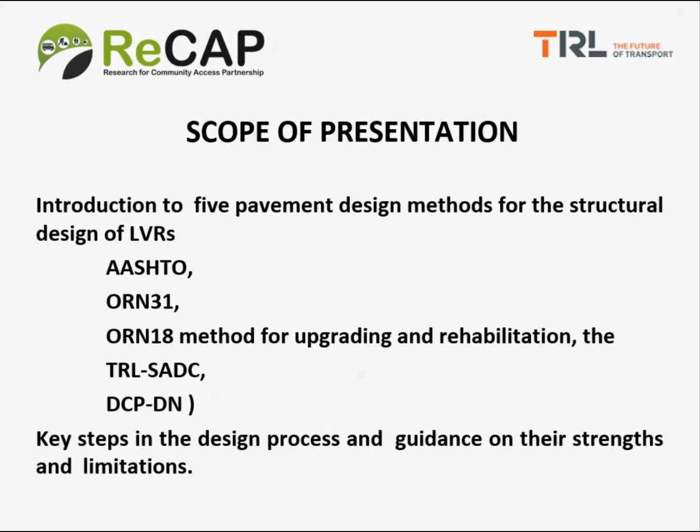What I'm going to do is introduce these 5 methods to you. Then we're going to go through the key steps in the design process and guidance on the strengths and limitations of all the methods, to help you choose which one to use.

The first thing we have to do when designing a new road is to make a decision on what type of road to build. Do we want an earth road, a gravel road, or a sealed road? We're going to talk about sealed roads in this lecture, but that decision has probably been made during the planning stage of the project. So let's assume that for now.

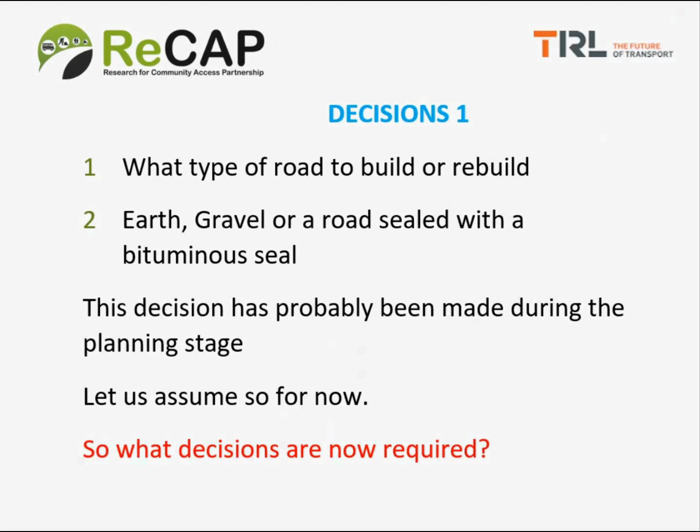So what decisions are we, as the structural designer, required to make? First, there will be some preliminary information available to you — measurements of the traffic level, for example, and potential materials we could use for construction. We'll assume these decisions have been made and we're now sitting down at our desk to do the design.

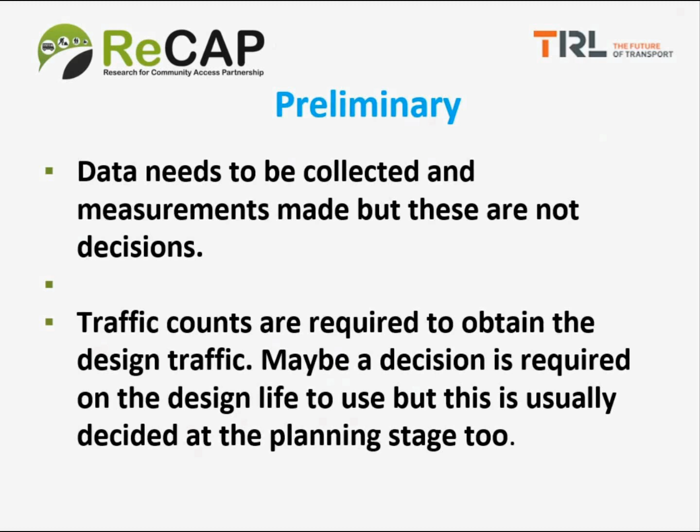The first decision we have to make is to determine or select the strength of the subgrade for the design process. The key difference between the design methods we're going to talk about is that they don't always do this in the same way — this is one of the major differences between the methods.

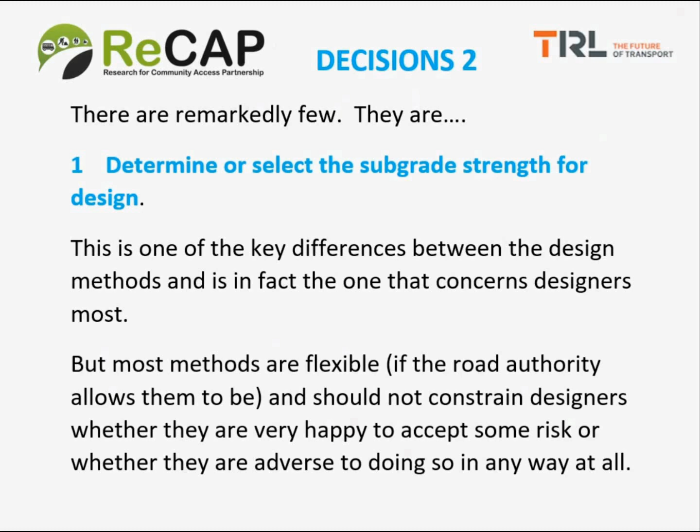But this is quite important: most methods of design are flexible, provided the road authority allows them to be. In other words, the designer has some flexibility or not. The methods do not constrain the designers, and in each method you have to decide how much risk you can take — are you going to cater for the worst possible conditions or not? The designer can make those decisions, and each method has its own way of dealing with this, and that's important.

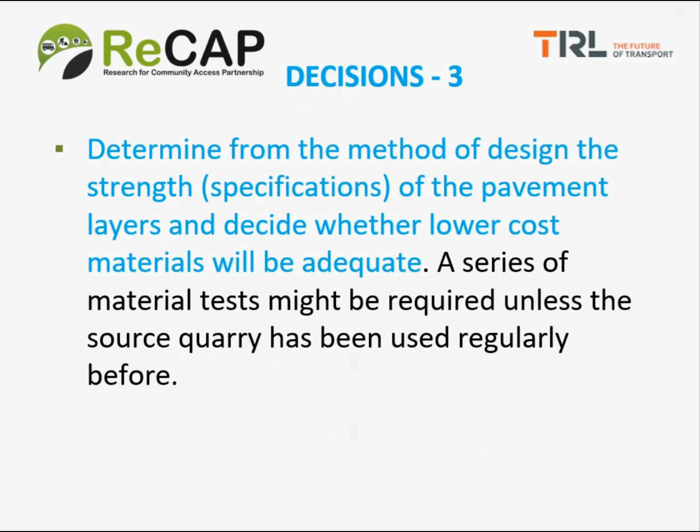Having looked at subgrade strength for design and how it should be assessed, the next decision is on the materials you're going to build the pavement from. There should be material tests available so you can see what materials are in your vicinity. You can also check whether you can relax the specifications for a low volume road — you don't need the major strength materials needed for a high volume road. The first thing to do is check whether there are other, less expensive materials available.

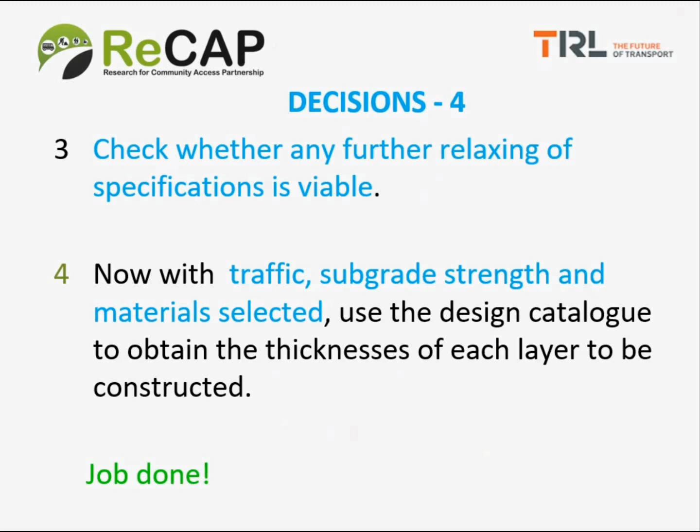Now you've actually made almost all the decisions you need to make. You've got your traffic level, your subgrade strength, and you've selected the materials. You pick up your design catalogue, and basically the job's done — literally done. You won't believe that, but you'll see in a moment.

Now we have some golden rules. The first and most important is that each method must be used in the way that the people who developed it, the authors of the method, intended. Unfortunately, this is not always made clear, with the consequence that methods can easily be used incorrectly. A good example is the one at the bottom of the slide.

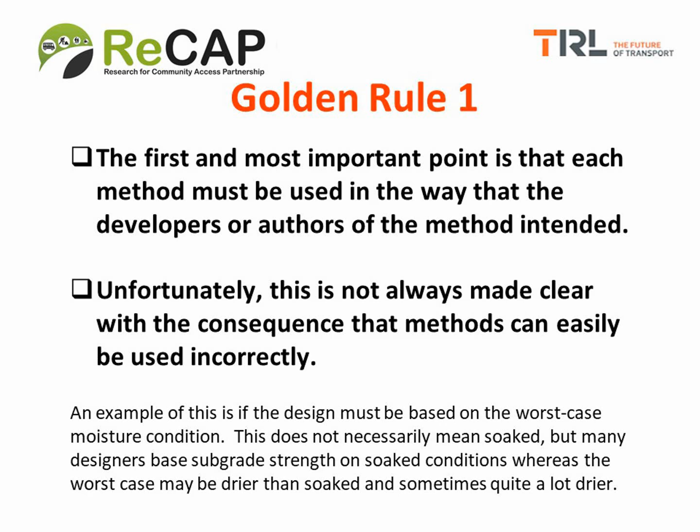A method may ask you to base your design on the worst case moisture condition of the subgrade. This does not necessarily mean soaked, but many designers base subgrade strength on soaked conditions, whereas the worst case may be rather drier than soaked, sometimes quite a lot drier. If you base it on soaked when you shouldn't, you'll be over-designing. That's perhaps one of the most common errors, which we'll come across later and show how to avoid.

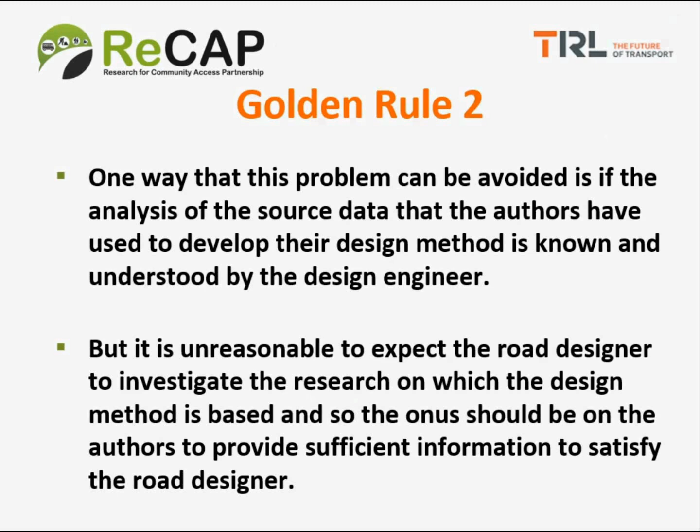Golden rule 2: one way this problem can be avoided is if the analysis of the source data that authors have used to develop their design method is known and understood by the design engineer. Of course, it's unreasonable to expect the road designer to investigate the research behind the design methods, so the onus is on the designers or authors of the manuals to provide sufficient information so the road designer isn't taking any risks.

Risk number one: risk is a necessary but unwelcome aspect of civil engineering. It's addressed differently in various pavement structural design methods, and this often causes uncertainty amongst designers. For example, for large structures such as bridges, failure is very expensive, so very safe designs are selected to withstand the very rarest severe storms.

Andrew has mentioned storm intensity and storm severity. The storm that occurs on average once every 100 years is the most severe storm. Designing for the very rarest storm events—maybe we should be designing our roads for something like that. But for small structures that are inexpensive to repair or replace, the 1 in 20 year storm, which is obviously not so severe, is used for design.

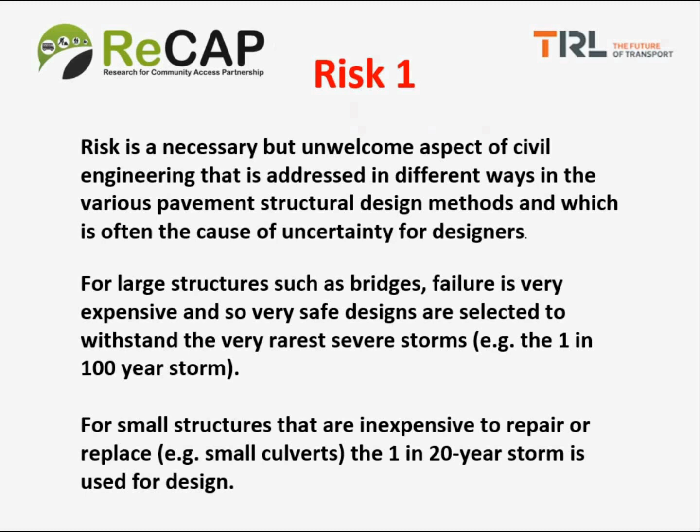So what do we do with our road itself, for more common storms? We've already talked about the problem of climate resilience, and we're well aware now that the climate is changing, so the question of safety risk comes in even more now than it used to. Andrew's given you some advice on how to design structures for severe storms and climate resilience, but what do we do about the actual pavement itself?

Few, if any, design methods actually define the risk levels they are catering for. Road designers are well aware that over the design life of a typical road, many things can go wrong—for example, there are likely to be severe storms. Ideal maintenance to keep culverts and drainage ditches clear and to rectify erosion and surface damage cannot be guaranteed. So the designer cannot predict the future; he has to take a risk.

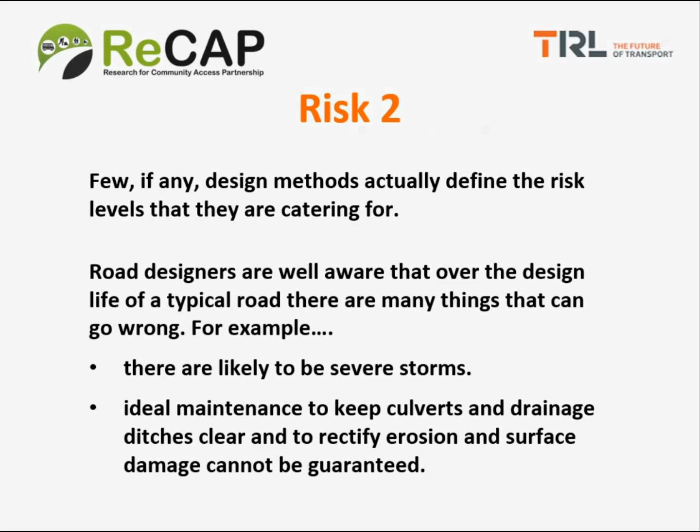We'll come back to those risks when we go into the design methods in more detail. Thus, with no easy quantification of risk available, designers are often tempted to err on the side of safety—a perfectly natural human reaction. We don't know what the problems are going to be, so let's play safe. But to do so, designers must understand how their design charts were devised and how they should be used. That knowledge is important for doing your risk analysis.

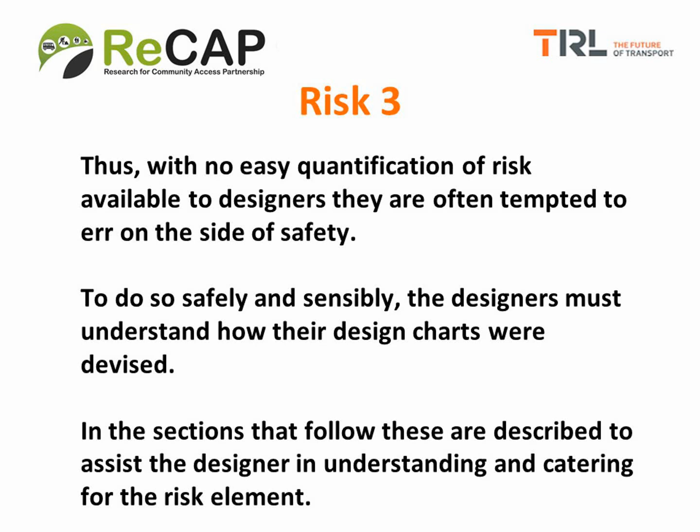In the sections that follow, the method by which the design charts have been built up is described in order to help the designer understand and cater for the risk element. Later on, there is a summary of all the risk elements in each method to make it clear to the designer. So that's really an introduction to the guideline, and I'm now going to go briefly through the different pavement design methods.

There's the list that I showed you initially. The first five are based on the California Bearing Ratio test, which most engineers will be familiar with—used for measuring the strength of materials, in particular the subgrade and the pavement layers. The last two methods are based on the use of the dynamic cone penetrometer.

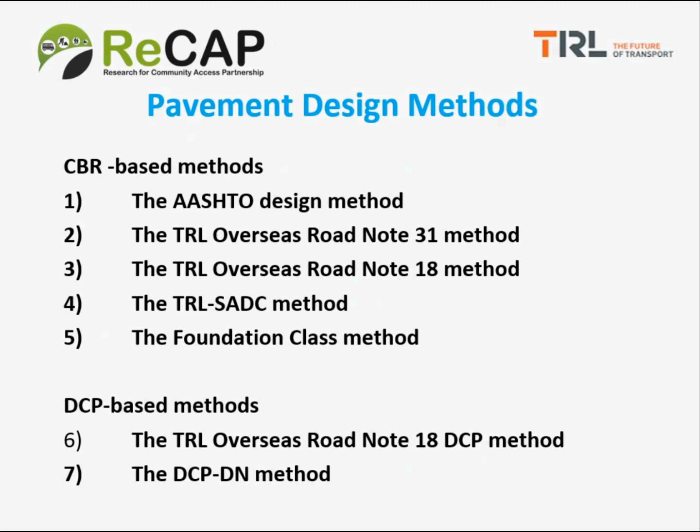In method 7, it completely replaces the CBR test—CBRs are not used at all in that method. Method 6 incorporates both the DCP and the CBR method. So essentially, those are all the methods that we're going to talk about.

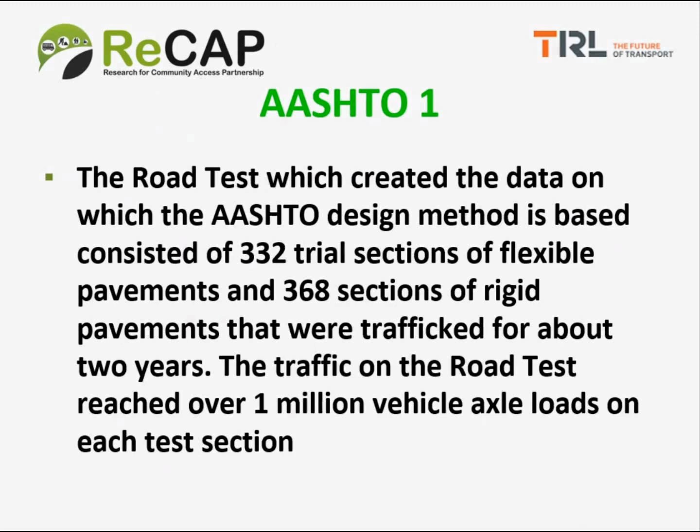The first method is the AASHTO method. It's based on a very famous road test that took place in the 1950s. A total of 332 trial sections of flexible pavement road were built in America, and these roads were trafficked for about 2 years. The traffic reached over 1 million vehicle axle loads on each test section. It was a massive test, and it led to the development of a pavement design guide, first issued in 1961, but updated in 1972 and 1993.

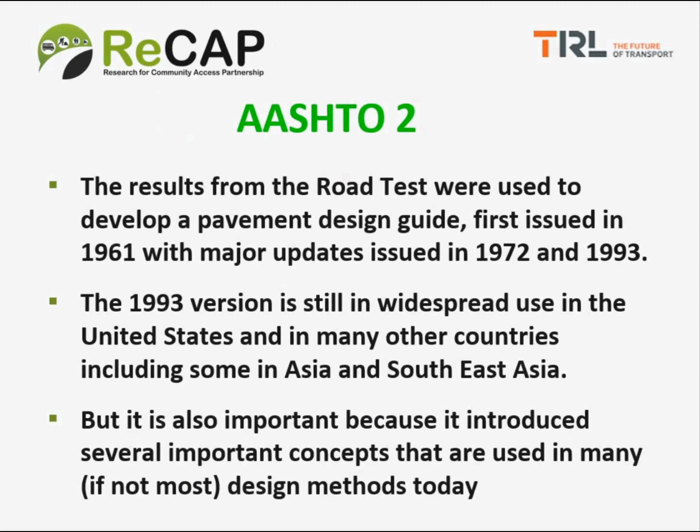The 1993 version is still in widespread use in the United States and in many other countries, including some in Asia and Southeast Asia. But the reason this particular method is included in the manual is that it introduced some very important concepts that are used in many, if not most, all design methods today. So it's important to understand those concepts for all the methods.

Key concepts used universally that were introduced in the AASHTO method are the way pavement damage is quantified, the concept of standard axles—which relates to the amount of damage an axle does to a road—the structural number, which is essentially the thickness of the structure you're going to build, and very importantly, what I've called variability and reliability. What came out of the road test was that roads, even if built identically, can behave quite differently.

There's huge variability in performance, and the AASHTO road test, or at least the design method, was the first that really took that into account in the method itself. It's quite important, as you'll see later. And of course, the last thing produced here was an equation, the model of the design equation that is used to do the designs.

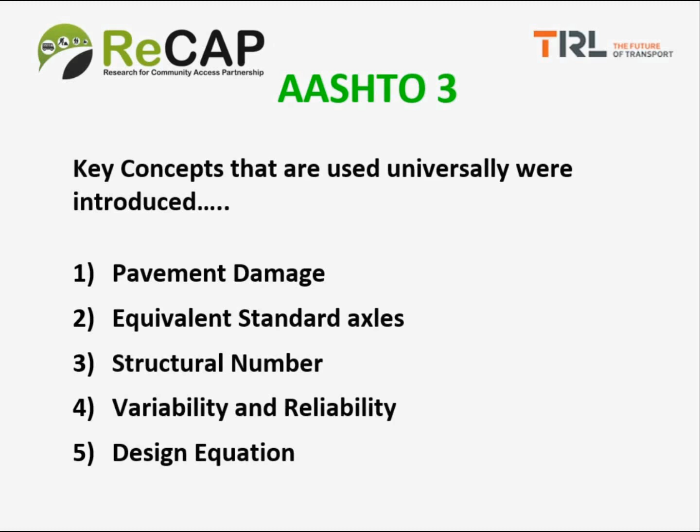So those are the 5 major concepts that came out of that road test. I have to go through them one at a time because they are universal. Damage caused by an axle load of L tons is compared with the damage caused by a standard load of 8.16 tons. The equation relating to the damage is that damage is proportional to the load raised to the 4th power, the so-called famous 4th power law.

So any axle of any load L is related to the damage caused by the 8.16 ton load, and we call that number the number of equivalent standard axles. Every design method that I've come across uses that. There are still 1 or 2 that still count vehicle numbers, but they're very few indeed.

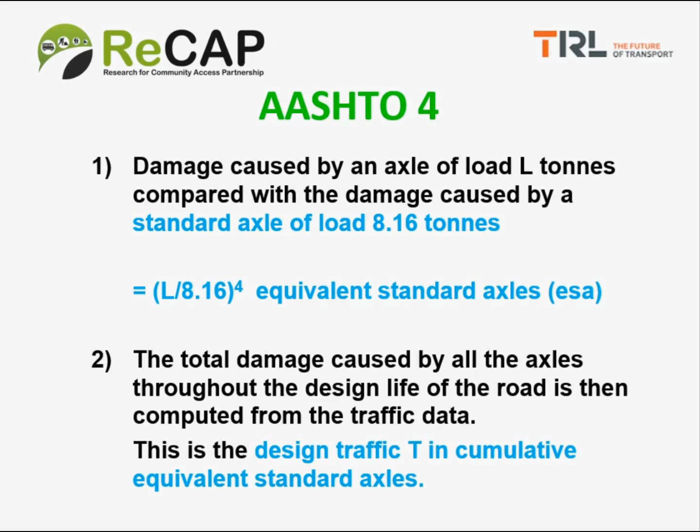The most important thing is that the total damage caused by all the axles throughout the design life of the road is computed from the traffic data. The traffic data tells us what traffic is using the road now, and what the future traffic should be. The traffic is turned into equivalent standard axles and summed over the whole design life of the road, and that number is used in the design methods.

The second concept is the structural number. It is essentially the total thickness of the pavement, but each layer is weighted by its strength. In the equation, H is the thickness of the layer and A is its strength, calculated from the normal methods engineers use to measure the strength of materials.

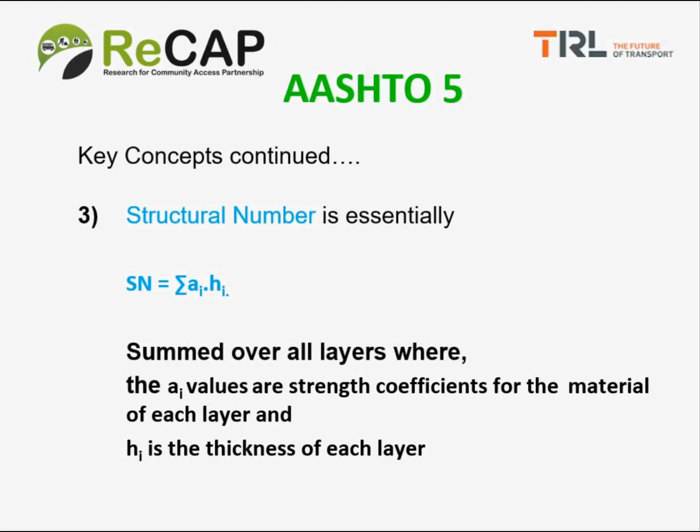That's all in the manual, and it's really quite easy to do. By calculating the structural number of one pavement compared with another, you can immediately see which one will carry the most traffic. So structural number is the second concept.

The structural number of the pavement is thus the total thickness made up of different layers, but each one weighted by the strength of the material, with the strongest layer at the top. The pavement thickness required, or the structural number, actually depends on just 2 quantities: the traffic level and the strength of the subgrade.

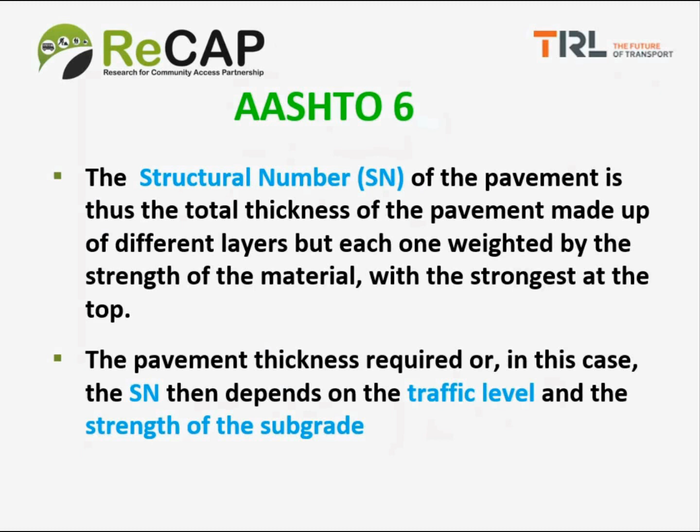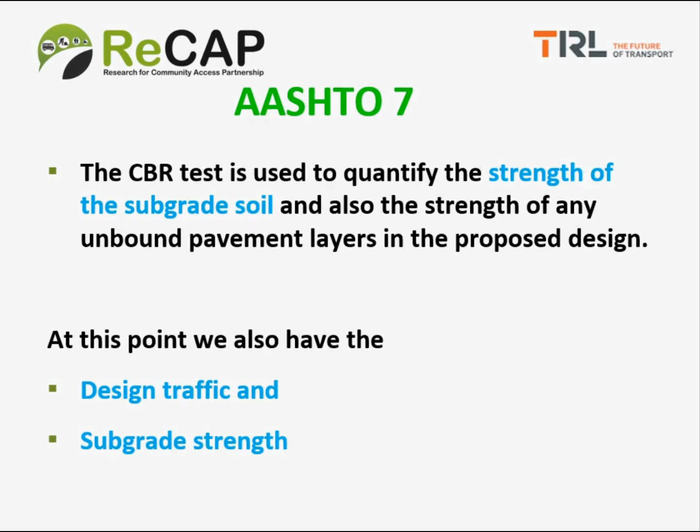The CBR test is used to quantify the strength of the subgrade soil and also the strength of any unbound pavement layers in the proposed design. So at this point, we also have the design traffic and the subgrade strength. The structural number of the pavement required to protect it from the estimated traffic loading is computed from the design equation.

So we've essentially finished the structural design, because we have the structural number to protect the pavement. All we now have to do is convert the structural number to actual materials, and then the layer thicknesses can be computed. You know how the structural number is calculated, so converting that into layer thickness is quite simple.

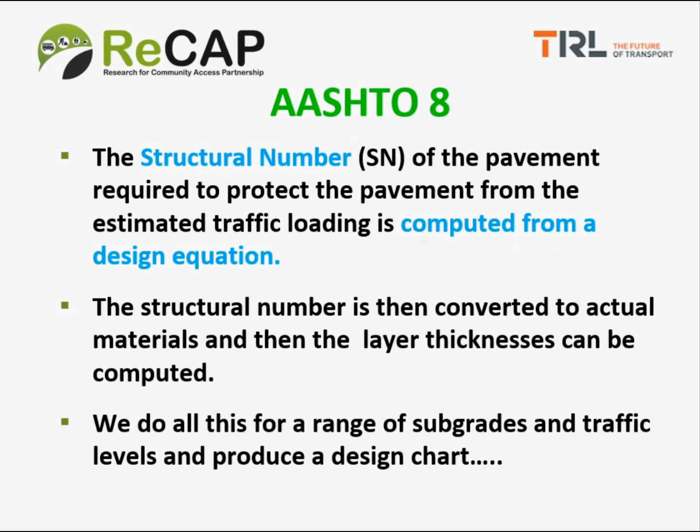Now we can do this for a whole range of subgrades and traffic levels using the design equation and produce a design chart. This is how most of the methods are presented to the designer. As you can see from the chart, the traffic level is along the top, and down the left-hand side is the subgrade class or strength. In each little box is a diagram showing the various pavement layers you need and their thicknesses.

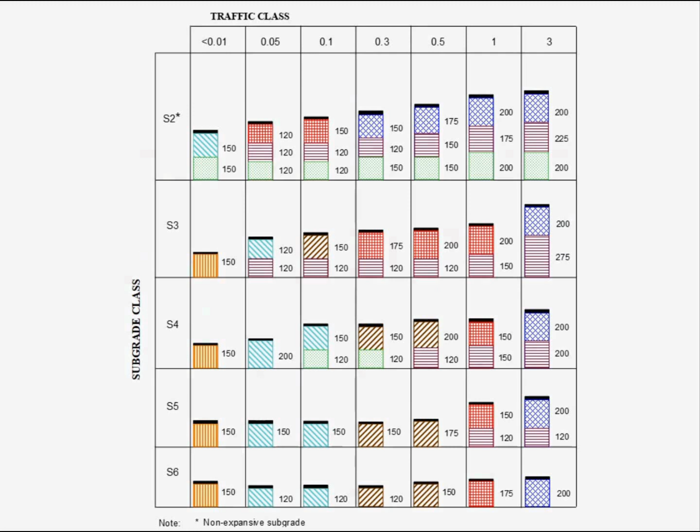In this particular case, we've used the design method 35 times and produced 35 designs covering those ranges of subgrade strength and traffic level. That is the easiest way designs are presented, and most methods do it this way. So what's the problem? We've got the subgrade strength, the traffic, the structural number, and we've worked out the thicknesses.

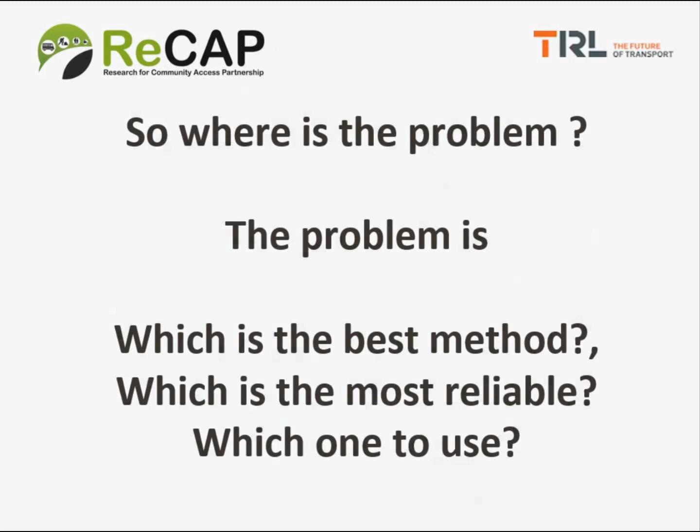What is the problem? Well, the designer will say, which is the best method, which is the most reliable method, and which one should I use? This is really the heart of the chapter and of the guide, to advise you on how to do this.

First of all, golden rule number 3: the methods are empirical and based on successful designs. The golden rule is that the method must be used within the range of conditions in which it was developed. There must be no extrapolation of any parameter.

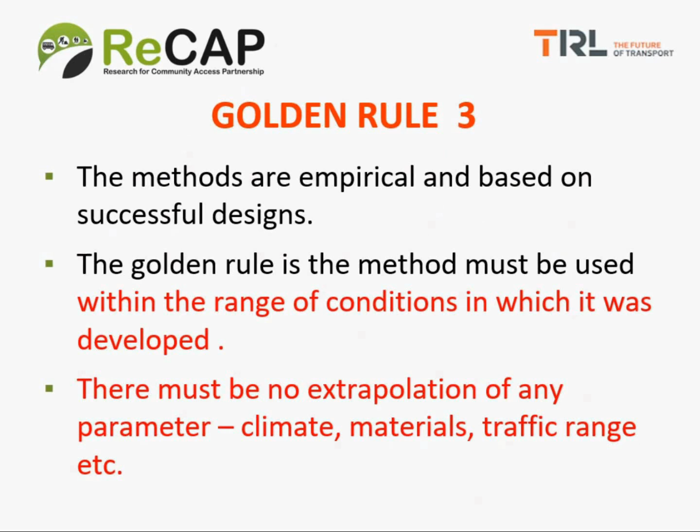We mustn't go to different climates. We can't go from the desert to frozen conditions in the north of Nepal. We mustn't change the materials. We must stick within the traffic range for which the design method was developed, and so on. This is really quite important and is a constraint on the use of certain methods in certain places.

This is not a golden rule. I've called it rule number 4. It's not a golden rule, but it's a confusing and useful rule.

Methods with a history of successful use are fairly reliable because they've been in constant use for many years and people are happy with them. But new research is showing that they may be a little conservative.

In recent years, we've been showing in recent research that pavement thickness designs are probably conservative because in the past, if a road did not perform very well, the reaction of engineers or the highway agency was to make the next road a bit thicker. But it isn't necessarily extra thickness that would have made the road perform well.

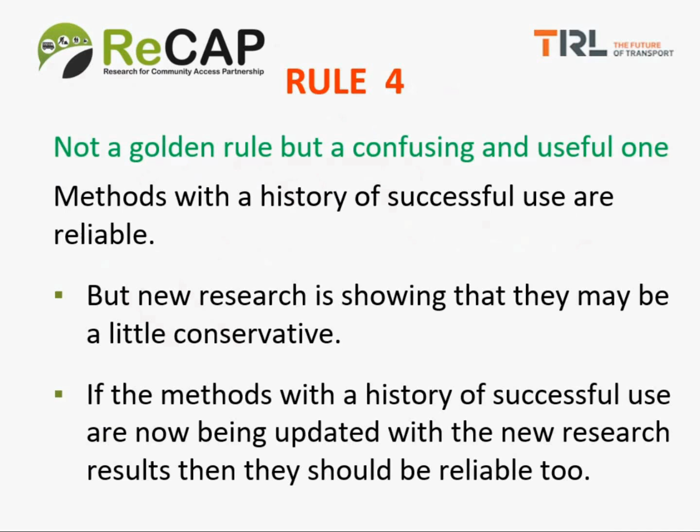It's not very often, or not as often as we used to think, that subgrade failure or failure to protect the subgrade is the main reason for failure. So in the past, I think designs have got conservative, and the new data is showing that some of the older methods that have been successful are slightly conservative, and we are revising those as we speak.

I said before that the different methods use different ways of estimating the subgrade strength for design. Overseas Road Note 31 asks you to find the weakest anticipated subgrade strength, the weakest anticipated CBR over the design life of the road. There are various ways that can be done, described in the Overseas Road Note 31 manual. Overseas Road Note 18 is for rehabilitation design or strengthening.

So you're basically dealing with an existing road. The subgrade strength is the strength of that existing road.

The TRL-SADC method uses a different method of anticipating the subgrade strength. The method is based on the performance of existing roads in certain climates and certain drainage conditions. And as long as you are reproducing those conditions, then your design should last as well as the ones on which the method is based.

It's slightly different, as you'll see later. The fourth method we've called the foundation method. That uses a soaked CBR of the subgrade. That is not necessarily the worst condition, but it's the method on which the system was based.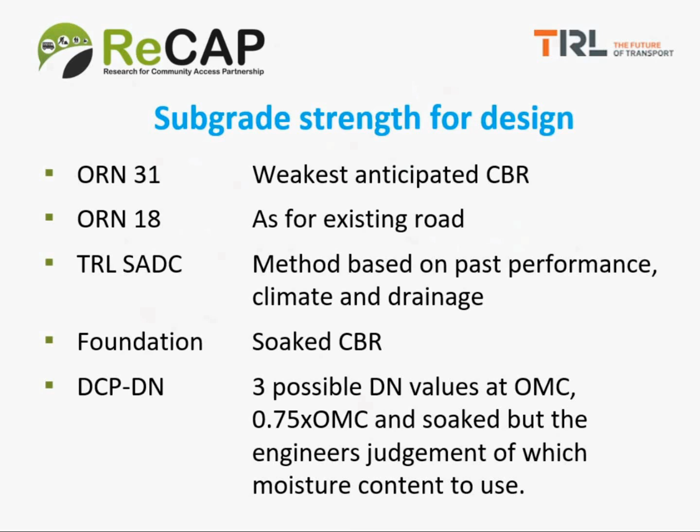So three different values. That actually turns out to be fairly similar to the Overseas Road Note 31 method, but that's by the by. What I've done now in the guide is give you a comparison list of the methods in terms of their strengths and limitations as to use. So we have a number of charts here that go through the strengths of each method and the limitations.

The AASHTO method was based on the AASHTO road test, which took place in one part of the United States, in one climate and obviously one subgrade. So it is not...

...considered initially to be a worldwide application, but the power of this particular method is that the way the analysis was done and the equation that was produced means it can very easily be adapted or calibrated to suit a wide range of conditions. And that is one of the reasons why it's used in so many countries now. Calibrated is perhaps the best word to use to suit a wide range of conditions.

It is also the only method that includes a true reliability factor, that recognises the inherent variability in road performance. That is taken into account explicitly in the design equation and allows you to design essentially to cope with variability. You can choose your level of risk, in other words.

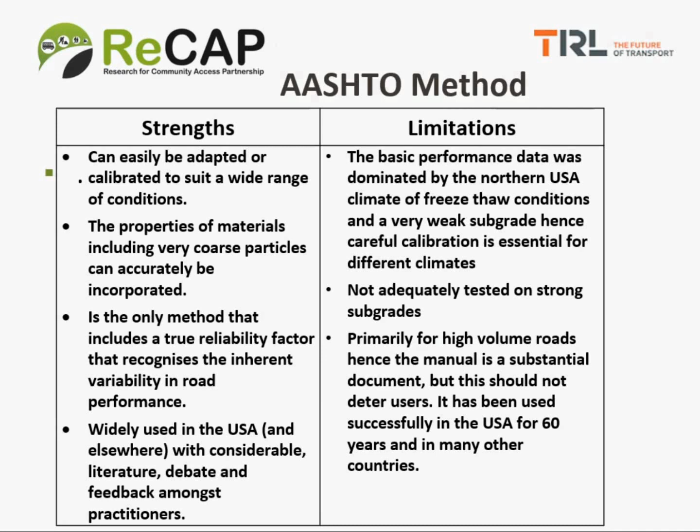As I said, it's been used successfully in the USA for 60 years and in many other countries. The Overseas Road Note 31 method is the method that TRL produced for specific use in tropical environments. The subgrade strength for design can be based on any moisture content.

In other words, the worst condition, the long-term equilibrium condition, whatever the designer wishes to choose, and there's some guidance on doing that in the manual. It offers designs for 8 different road types, including stabilized road bases. So it's not just natural gravel road bases, which is generally what one would use for low volume roads, but occasionally it's necessary to stabilize a layer.

It's been in use for about 40 years in a wide range of climates. The limitations of the Overseas Road Note 31 method: 3 traffic classes below 1 million standard axles, and we would like more, I think. For low volume road material specifications, the Overseas Road Note 31 specifications are a little conservative because, as I say, there are only 3 classes for the very low volume roads, and Overseas Road Note 31 goes up to about 30 million, so it covers the whole range.

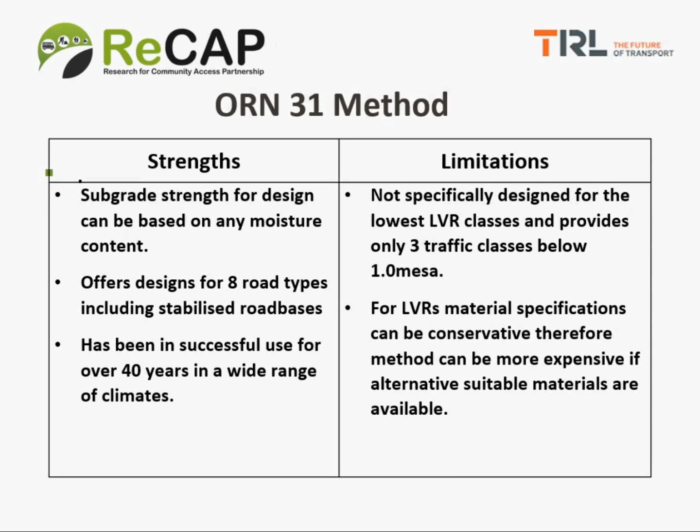The TRL-SADC method is based on some research carried out by TRL in 3 countries in Africa. It offers 2 design charts that are based on the climate and the basic drainage quality. By drainage quality, we mean sealed shoulders, the height of the crown of the road above the drain, etc., in the way that Andrew described it in the previous module.

It provides 5 traffic classes up to 1 million standard axles, so it should be sufficient to cover the range that is required for low volume roads. Subgrade strength is measured in the soaked state, but that doesn't mean that we're expecting the subgrade to be soaked in reality. We're just labeling or indexing the subgrades that are available.

So basically, in the experiments on which the method is based, the subgrades were soaked, and if your subgrade, soaked, has the same value, then it will behave in the same way that the experimental pavements behaved. And of course, those in the design chart are the ones that behave well. So there should be no worry about subgrade strength.

The material specifications are comprehensive, but again, they've been tailored to a pragmatic level suitable to the task of a low volume road. In other words, they're not as conservative as the Overseas Road Note 31 material specifications. In fact, I suppose the best description of the TRL-SADC method is that it's essentially very similar to Overseas Road Note 31 in form, but modified. The material specifications are modified to capture the results of recent research.

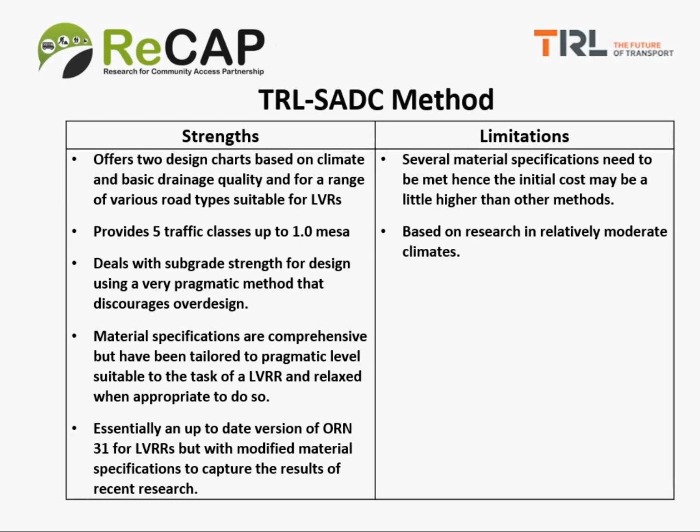The main limitation, I think, is that the countries in which the method was developed, on an international scale, would be classed as moderate in terms of climate. We don't have monsoons, but certainly in some of the countries we have some very severe conditions these days. The third method is what we called the foundation method.

In this method, we construct a foundation which will be the same for all structures for a particular traffic level. In other words, we form a reliable foundation that can be readily and routinely checked by measurement of its bearing capacity, using the normal simple tests for bearing capacity: a falling weight deflectometer, a lightweight deflectometer, or a plate bearing test. As we know, the greatest variability in the structure of a pavement comes through the subgrade, because the subgrade is very variable.

On the brows of hills, the subgrade can be quite dry and strong, but in the valleys, where rivers are flowing, it can be wetter and weaker. So as you go along any road, your subgrade is varying quite a lot, even though you've designed the road on the most uniform sections that you can define. So the variability in the structure comes from the subgrade.

So if you check your foundation before you put the rest of the pavement layers on, you can identify quickly where weak areas are, and they can be corrected before the main structural layers of the pavement are put on. And this is a good way to enhance quality and therefore performance.

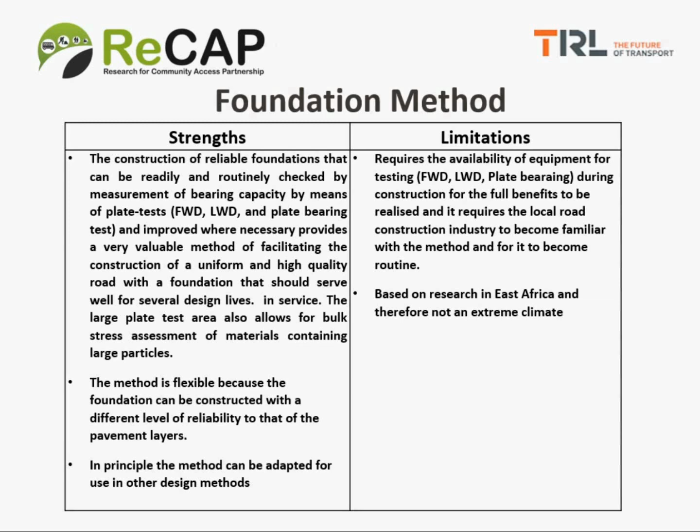The Overseas Road Note 18 DCP-CBR method is for upgrading or rehabilitating an existing road. One of the most important features is that we must get as much information as possible about the existing road. The DCP is a very valuable instrument because each test takes a very short time, so you can take many tests which give you details about the existing thickness and strength of the layers. It also allows you to define uniform sections that can be treated separately fairly quickly.

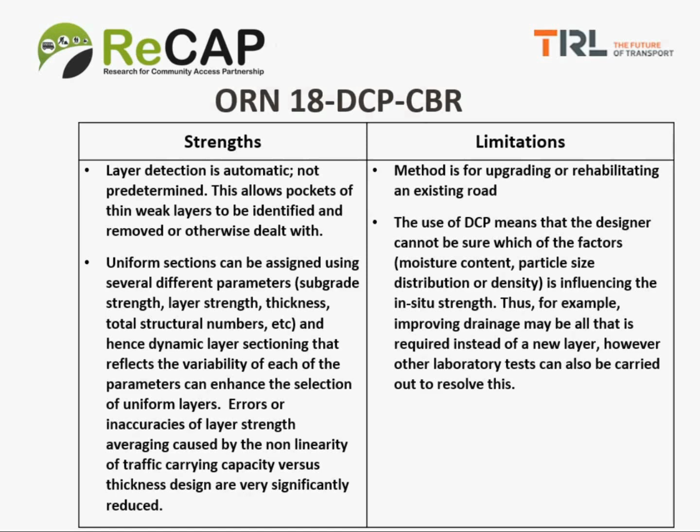However, it's not just the strength testing of the existing road that's important. The most important thing for upgrading or rehabilitating an existing road is to do a study of what has caused the poor performance of the road to be what it is. It's a forensic study, not just the thickness and strength. It may be just a drainage problem, or it may be whatever. You need to do the forensic study, and Overseas Road Note 18 is a manual that shows you how to do that.

Next method is the DCP-DN method. This is based on the DCP test, which completely replaces the CBR test. The method was established in South Africa, is not yet established in more severe environments, but is being trialled in several countries.

The use of the DCP to identify uniform sections saves on the cost of test pits, but obviously some test pits are required. Less stringent material specifications give flexibility to use different locally available materials, but this is also being revised, since less stringent specifications could lead to an increased risk, which is why more work needs to be done. It's also very applicable in situations with limited laboratory equipment, which is the case in many remote parts of the country. So that's a very useful strength.

One of the limitations is that the method assumes the subgrade is between 450 and 800 millimeters below the finished pavement surface, and this is not always the case, so that can create a bit of a problem. The method is only applicable to natural and untreated materials - it doesn't deal with strengthened or cemented materials. It's not applicable on roads requiring deep cuts and fills of more than 1.5 meters, because the DCP is a measurement system of limited depth. The handle is normally 1 meter, with extensions up to about 1.5 meters, but obviously not applicable if you need more than that.

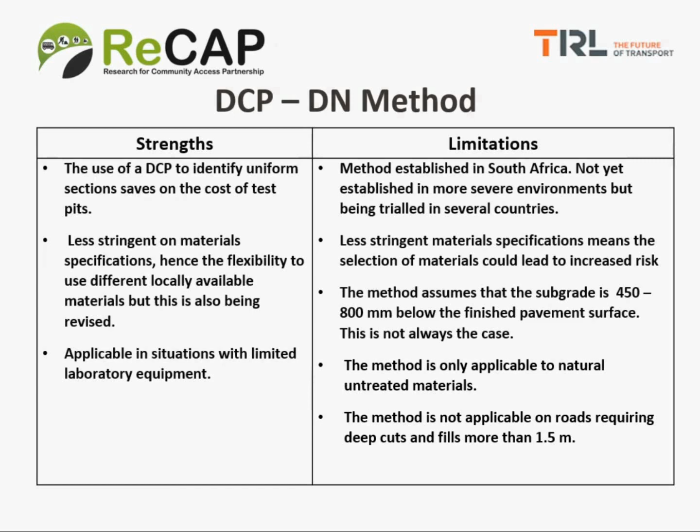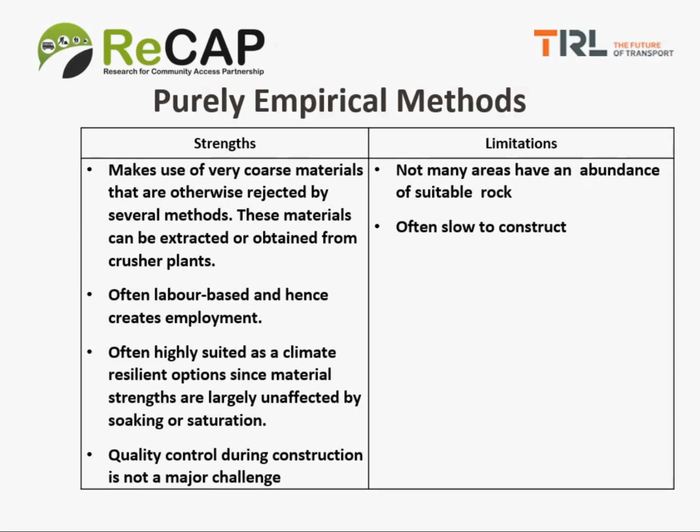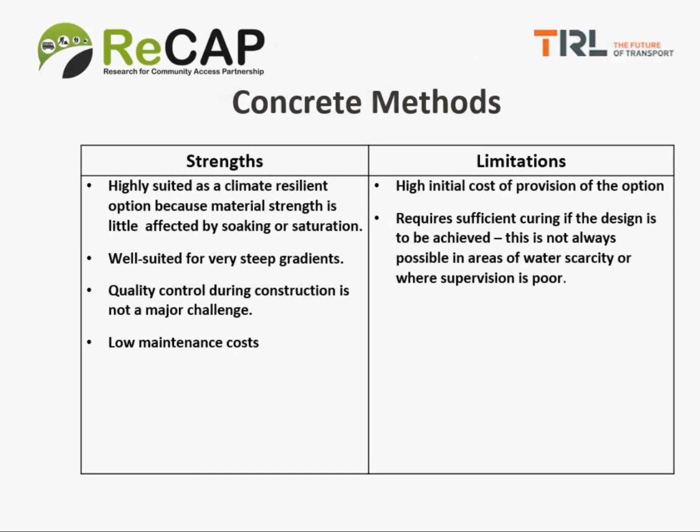So basically, we've been through some of the risks, strengths and limitations of some of the methods, and hopefully I've given you a good idea of how to select the method you want to use and which one to rely upon. So with that, I would like to say that is the end. Thank you for your attention.